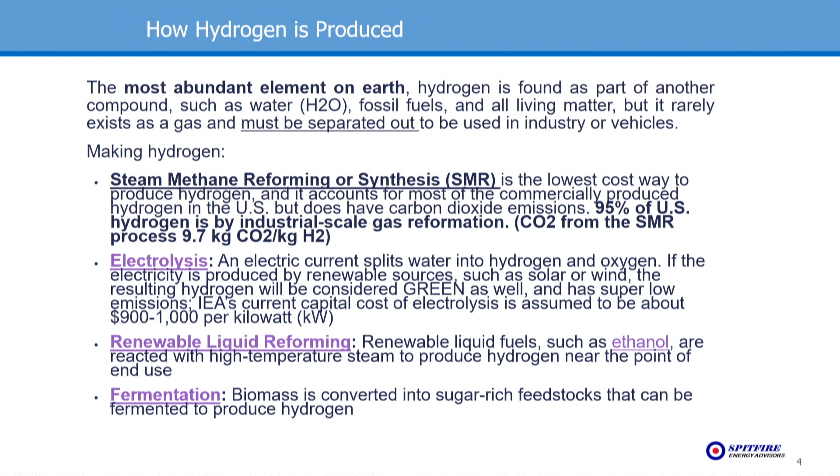That doesn't seem to make sense, but you take steam, high pressure, and natural gas, and that's how you make hydrogen. What people are talking about now is green hydrogen, using renewable electricity, wind and solar or hydro, and putting that into what they call an electrolyzer. In essence, you are breaking the water molecule into hydrogen and getting oxygen, which sounds pretty good. And that science is all proven technology.

Electrolysis, very simple math. This has been around a long time. It's, in essence, using electricity to break water. But you do have to have water to use the electrolyzer to make the hydrogen.

Now, again, talking about chemistry and politics. So we've got green hydrogen, which is made out of renewables. You've got blue hydrogen, which is traditional natural gas, but you capture the carbon on the back end of the SMR, the steam reformer, and you sequester that. Either use it for producing oil, which again doesn't seem to really make sense, or you can put it into old reservoirs. So that's what they mean by blue hydrogen.

Then turquoise hydrogen is, in essence, coming from the natural gas of an SMR, but you're using renewable natural gas, like from a pig farm or manure or that kind of thing. So that's another form of hydrogen they call turquoise. The gray hydrogen is traditional - some people call it brown, some call it black, some call it just bad. So these are the colors you get to deal with, but green hydrogen is really the holy grail, the unicorn that people are after.

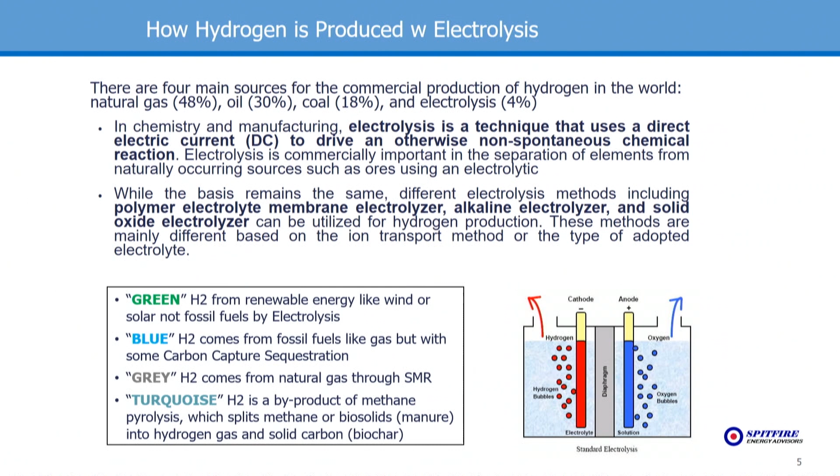Oh, I forgot to ask, how many MMBTUs are in a ton of hydrogen? Well, the answer is right there. Somebody say it. So just to give you a little perspective, 114 MMBTUs per metric ton of hydrogen. And I think most people here are gas and electricity people, so MMBTU is a language that I use a lot, but hydrogen is most often measured in tons and kilograms and megajoules and pascals, so there's a lot of units.

So I want to try and give a little bit of flavor for how you can move between electricity, hydrogen, CO2, and methane, good old natural gas. An important thing to think about: a kilogram of hydrogen has about the same energy content as a gallon of gasoline, just to try and give you a little perspective.

Now the interesting thing is it takes about 3 gallons of water to make a kilogram of hydrogen. So think of taking 3 gallons of water and getting the energy that's in a gallon of gasoline.

And it's not seawater. A lot of people say, oh, we'll just put a plant next to the ocean and use all the seawater. It has to be relatively clean water. It could be the water off of a waste treatment plant, that's clean enough. But you would have to clean up river water, which is not too big, but it is an extra step that often people ignore.

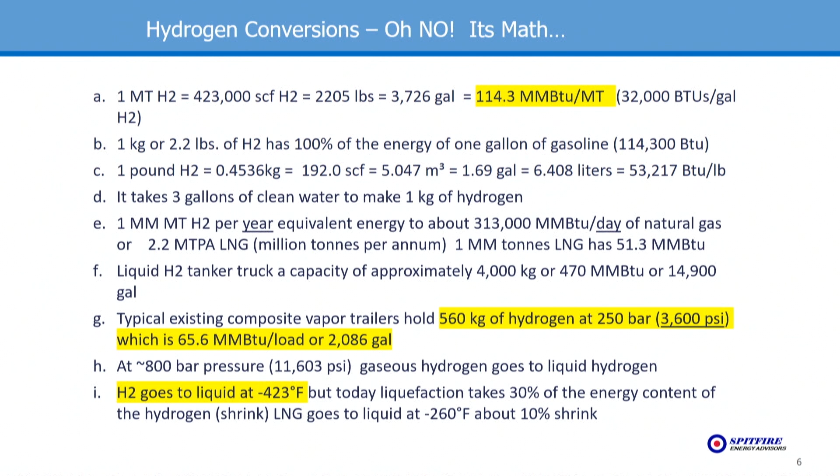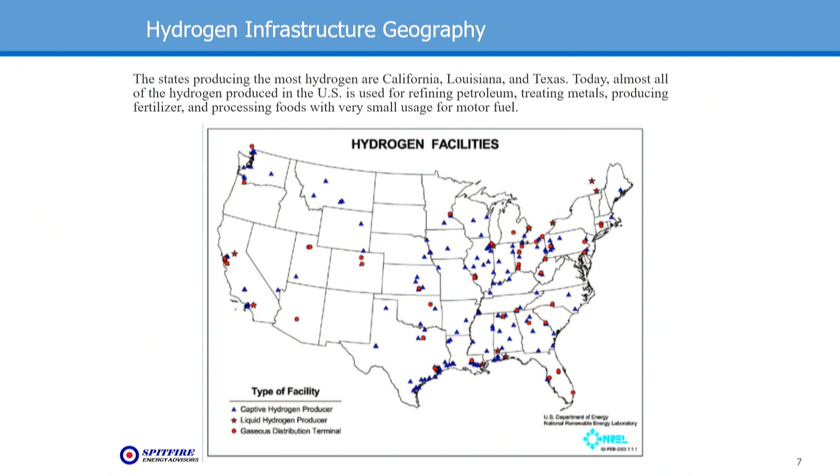So just to move along, there are a lot of hydrogen facilities around. I did not appreciate this, but I was talking to the team from Aiken, South Carolina, and they've actually got a little hydrogen production plant, and they're producing hydrogen there and actually selling it to the general public, which I did not know. This talks a little bit about the geography of where hydrogen is.

The country right now is using about 10 million tons a year. What's that mean? That's about 3 million MMBTUs per day. So it's an interesting marketplace, but it's been traditionally for refineries, chemical plants, things of that sort.

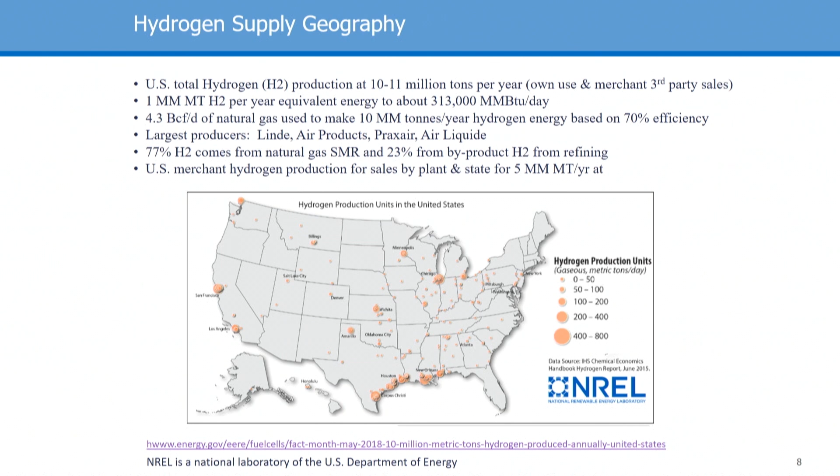The big companies, you may know, Air Liquide, Prax, which is now, they bought Praxair, Linde, and Air Products. And they're out moving hydrogen, and they wish that this whole thing would go away, because they've been making a lot of money taking air, taking water, and making hydrogen and making lots of money, and nobody ever bothered them. Now their phone's ringing off the hook, and now the regulators are calling them going, I didn't know there was a hydrogen pipeline through this state. So a lot of issues around that.

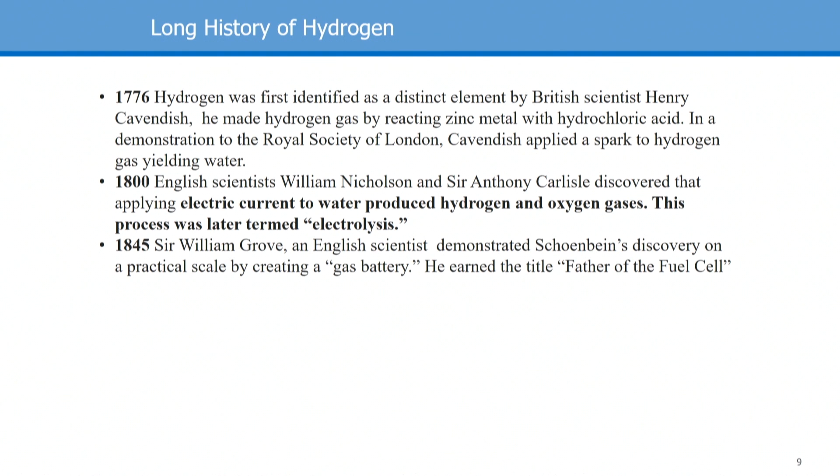So what happened famous back in 1776? Well, the United States got born, right? Well, some chemists would say a more exciting event was the development of the science of hydrogen. So hydrogen's been around a long time. In 1800, people started using it, talking about it more. And then in 1845, before the American Civil War, they actually created the first fuel cell. So this technology's been around for a while.

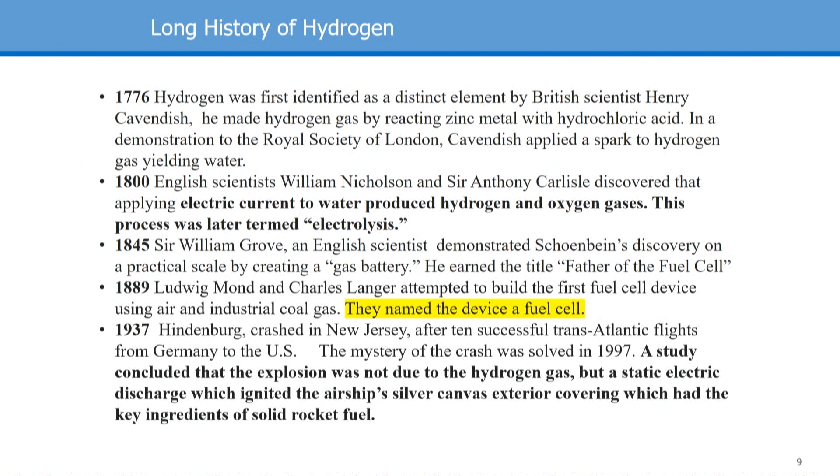The last bullet, I like history, so I thought this might be a little fun fact for you. Maybe you can win a free drink. The Hindenburg did not catch on fire because of the hydrogen that gave it lift. It was actually the paint on the skin. They didn't realize it at the time, but that paint was highly flammable. And so there was an electrical storm, a lightning strike, and that's what caused the Hindenburg fire. It wasn't the hydrogen that was stored in the Zeppelin.

So most of the hydrogen, as I said, is used for refineries and for chemical plants, but also for fertilizer. And in the Midwest here, lots and lots of ammonia goes for corn and crops and all that type of stuff. So that's a lot of what hydrogen is used for, and it's important as a fertilizer for food.

I did bring a small bottle of hydrogen. You might be able to see it from where you are. And good news, bad news, it's not poisonous. You can't see it, you can't smell it, but it was in there, promise.

Let's see, what's next here. Oh, I put this in because I wanted to appreciate that there are hydrogen transportation systems out there. I didn't know about the one in Aiken, but there are not very many. There's about 41 filling stations in the whole state of California. So it is very much in the early stages of development. We haven't seen Exxon and Shell and those guys jump in with both feet just yet. But Shell is a leading retailer of hydrogen in California, but there's only 41 stations.

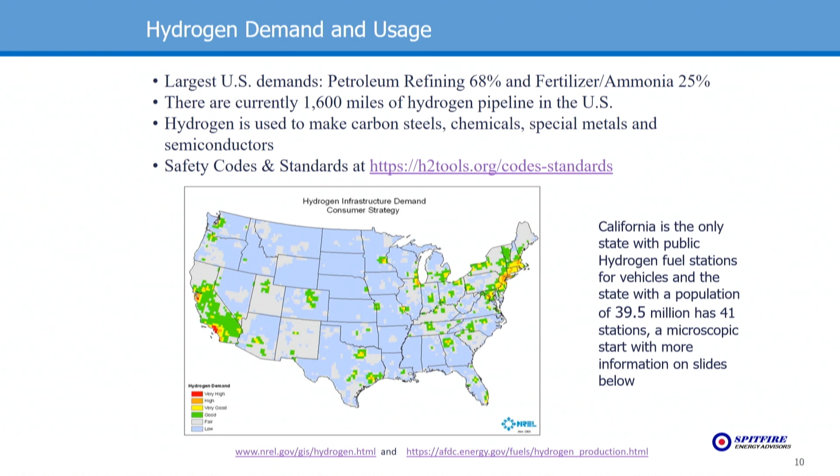So talking about hydrogen as a chemical, I mentioned odorless. It can be a volatile fuel. It does have a flash point, a wider flash point than methane. So you do have to have real serious safety concerns around using hydrogen. But it does disperse really quickly because it's very, very light. And that's a good thing, but being very light means it's hard to transport, hard to compress, hard to liquefy. So the transportation of hydrogen is expensive.

Kind of talked about where we use it in refineries. I thought this was an interesting scientific answer. As the products of the reaction are at a lower energy level than the reactants, the result is an explosive release of energy and the production of water.

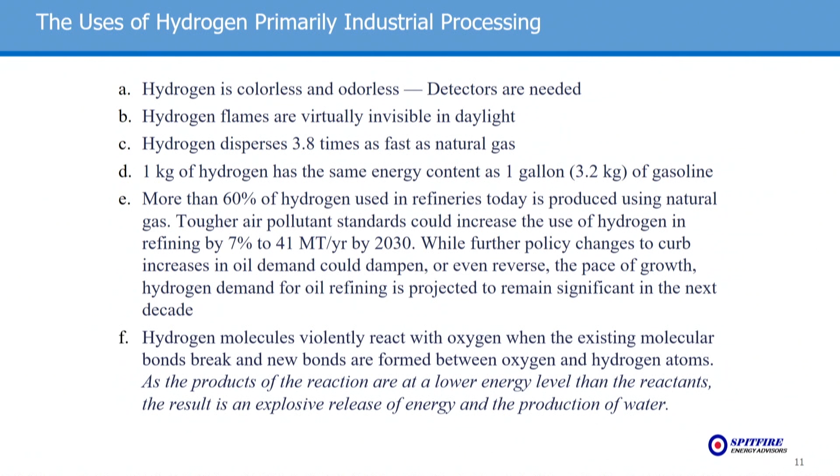Well, that's how you consume it. That's the scientific approach. We just use it in an engine or a fuel cell.

So there's upcoming slides here that talk a little bit about the cost of making hydrogen, and then I'll talk about the cost of transporting it. You do need water, as I said.

Think about a kilogram, $1 a kilogram is about $8.50 an MMBTU. Gasoline at $2.50 a gallon is about $21 an MMBTU. Often people don't appreciate how expensive gasoline is on an MMBTU basis, but that's one reason gasoline is good, because you've got a whole lot of energy in a very small space. It's the exact opposite with hydrogen, and I'll talk a little bit more about that.

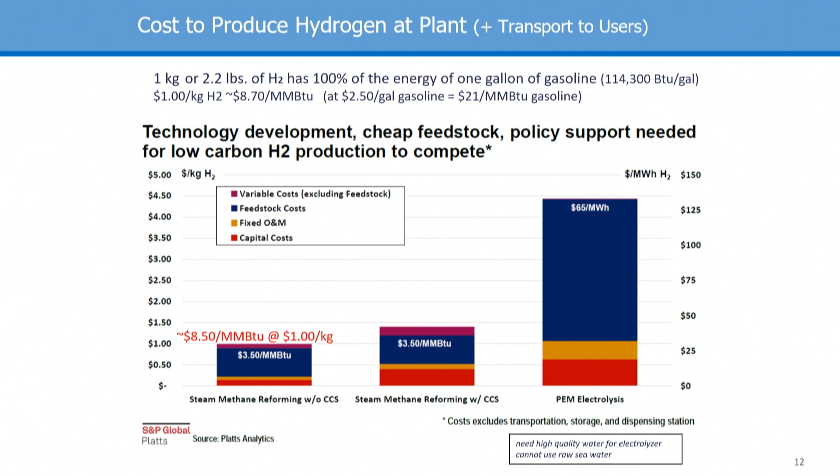So on the left, you see $8.50 for $1 a kilogram. That $1 a kilogram is traditional natural gas into hydrogen with an SMR—brown, black, gray, whatever you want to call it. That has been traditional. That is not what environmentalists or politicians want to see. They want to use green hydrogen with electrolysis, which is the price on the far right.

RBN, if you're interested in hydrogen, they actually have something called a hydrogen billboard, and it's free. They have a good story once a week talking about hydrogen. The guys at RBN I talk to all the time, and I would say that they're very knowledgeable in the space. So I'm going to read the last bullet.

Green power, solar or wind, at $30 will give you hydrogen at about $2.90 a kilogram. That's $24, almost $25 an MMBTU. So it is not inexpensive.

This is a summary looking at producing hydrogen based on gas price. I personally think you're going to have pretty stable natural gas prices for a while, maybe around $3 for quite a while to come. Fracking has done a good thing for the country and given us a lot of cheap energy. And now we want to turn that cheap natural gas into more expensive hydrogen. That's an interesting math problem somebody's going to have to explain to me.

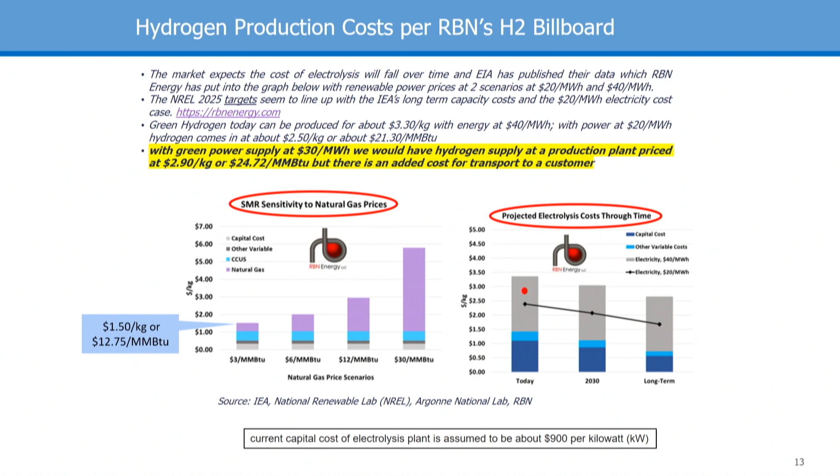But if you think about how electrolysis works, people are assuming, and this is probably a good assumption, that science is going to take over and that you will see the cost of producing hydrogen come down. But right now, as I said, with traditional SMR, we're kind of in that $1 to $1.50. And if you're using $30 power, that gets you to about $2.90 per kilogram, which is $25 an MMBTU.

This is another slide from a different authority talking about how they see price, but it kind of all rolls into the same thing. There are different types of electrolysis technology, and the scientists are working a lot on this right now. The federal government is spending a lot of money on research, just like they are with batteries. There are a lot of study groups and a lot going on. There's a lot of information online, and in the slides that are in the handout, I've got a lot of website links to give you connections to some of that data.

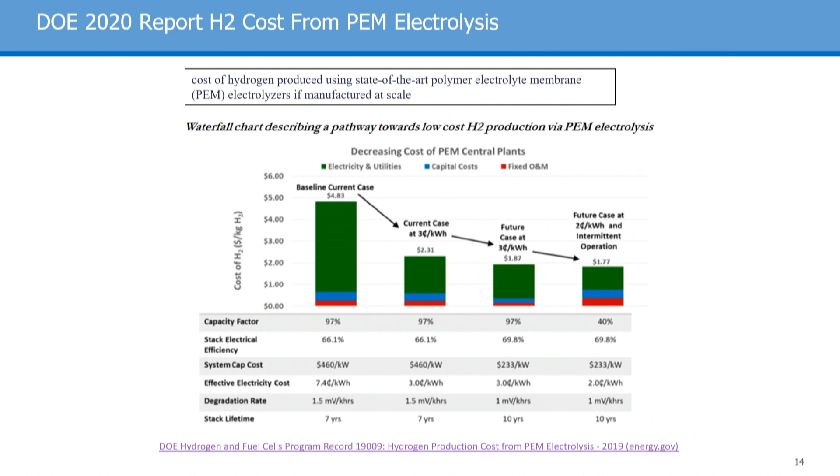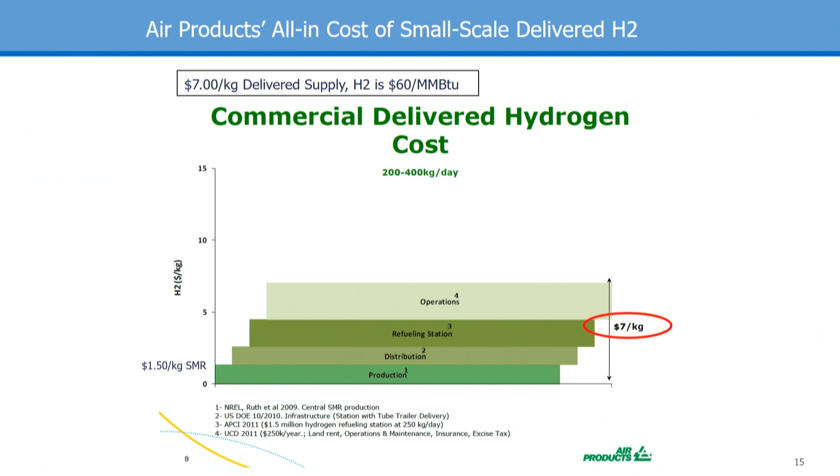So if you think about that $1.50 to make it, the killer is to transport it, to store it, and to get it into a car or a truck—about $7. And that $7 equates to about $60 an MMBTU. So think about gasoline at $10 or $12 a gallon. That's the theoretical hurdle that people are going to have to get comfortable with. Would you choose to pay $12 for a hydrogen fuel fill-up versus where we are today?

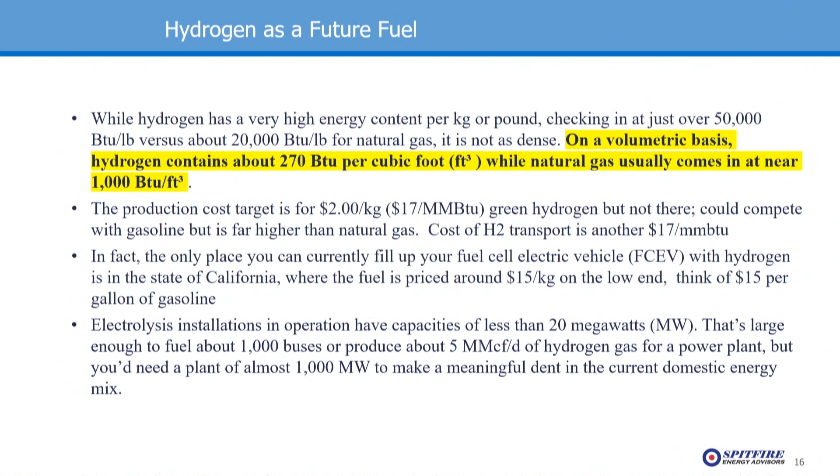So I was talking a little bit more science, a little more technology. On a volumetric basis, hydrogen has 270 BTUs versus natural gas at 1020, 1030. So that's part of the issue. And that's why we put gasoline into cars, because you have a lot more energy in that small volume. And that's part of the problem we get to with hydrogen.

I talked a bit about green hydrogen, using solar and wind. You put that into the electrolyzer, and then what do you do with it then? Well, you can truck it or build a hydrogen pipeline. I want to talk a little more about what that means.

Part of the issue with burning hydrogen in a conventional engine is you get a lot of NOx. You don't get so much CO2 or other particulates, but you do get NOx. That's why hydrogen in a conventional car is not a good thing. That's why you see Ford, General Motors, and Toyota all using fuel cell technology, because that really is zero emissions for road fuel, if you can pay the price. So the technology's there, and I'll talk a little more about that.

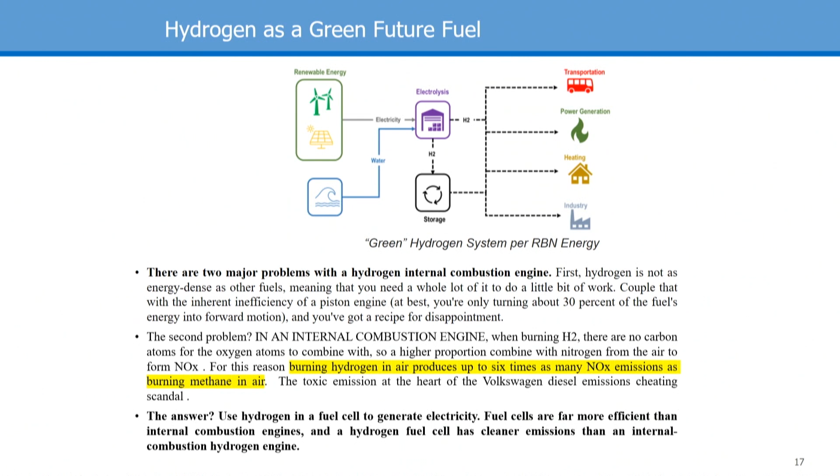For power guys and gas guys like me, the important thing is some more math talking about how many cubic feet you get from electrolysis, how much natural gas you have to put in. I'm not going to go through all the math here, but you've got the study sheet to take home. I think the important thing to realize is that if you put 1 megawatt of solar or wind into electrolysis, you get about 42, 43 MMBTUs of hydrogen out the back end. So that gives you a little bit of feel. You've got to have a whole lot of wind and solar to make any significant amount of hydrogen. Any questions out there?

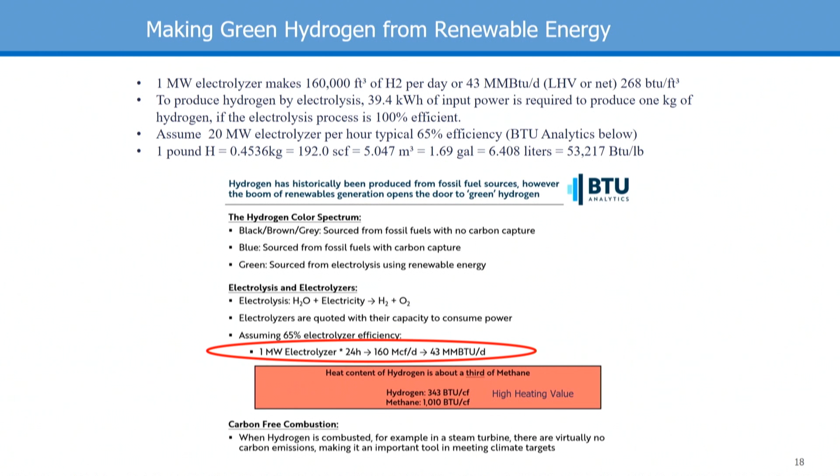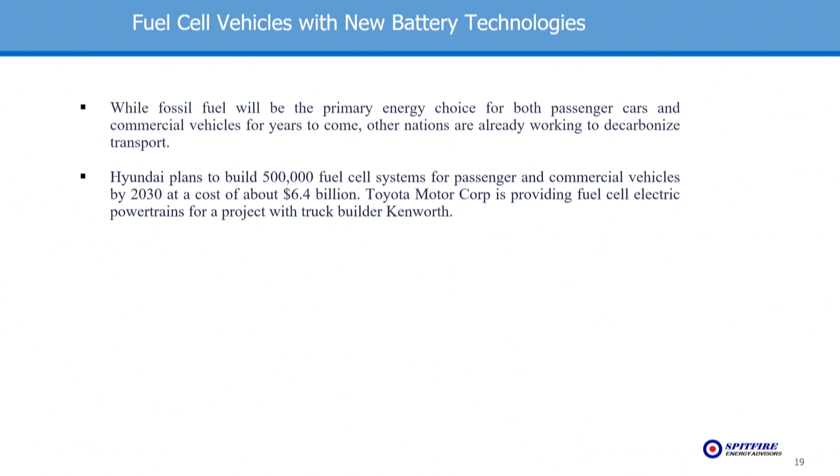So I was talking about fuel cells and how they work. Hyundai has got a workable technology. The good thing is people have been working on hydrogen for a long time. When oil was $100 a barrel, people were using natural gas for vehicles, and LNG was going to be the next renaissance. But there were a whole lot of people putting money into research to use hydrogen because they knew it was zero or very, very low carbon emissions. So a lot of money's been put into it. The technology's there, we don't have to invent the wheel. This is all pretty available stuff as long as you can afford it.

The important thing, too, is it's not just cars, but there are now trucks, 18-wheelers, that can store enough hydrogen on board that they can go like 300, 350 miles. So it is a workable fuel for long-haul transport. Part of the math model is what's it cost to buy one of these trucks. It's a little more expensive than a diesel truck, and it's harder to find hydrogen at this point. So you'd probably use the trucks where you've got a nest, like in a harbor, like Long Beach or LA. They use LNG for all their trucks. The Port of Houston would be a good place to use hydrogen. So a lot going on.

The important thing, too, with these 18-wheelers, the complaint with natural gas was you didn't get enough acceleration. You mashed on the gas, you didn't get what you needed. Well, Tesla broke the code on that, so when you get in a Tesla and push the pedal down, you're going like a gunshot. The trucks, the 18-wheelers, have developed the engine package now so that you get enough torque to handle a 50 or 80,000 pound load. And that's what those guys are looking for. They didn't want to have a load restriction on an 18-wheeler chassis.

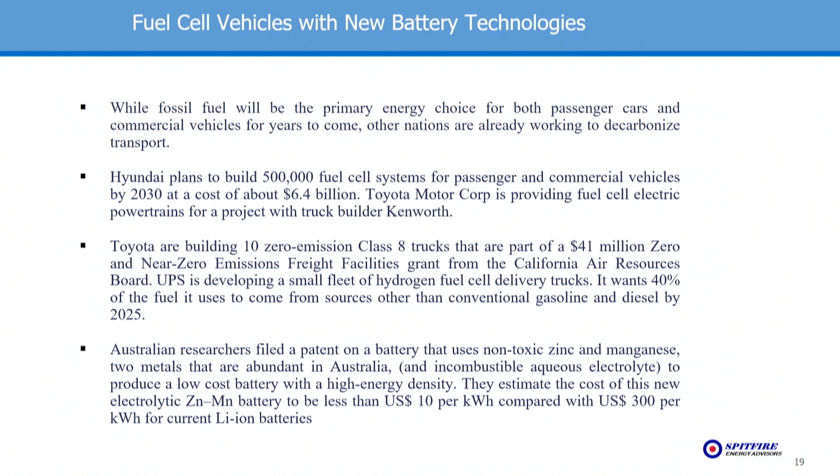So a little more information about a fuel cell in a car. You basically put hydrogen in. There is a process in the fuel cell to produce electricity. The electricity then uses a motor to produce work, and off you go. Toyota has done a really good job of selling their product, but it really is workable. Now, most of these cars have an onboard battery, and that battery is typically charged when you press the brake. So they are trying to capture as much energy as they can to make it as efficient as possible.

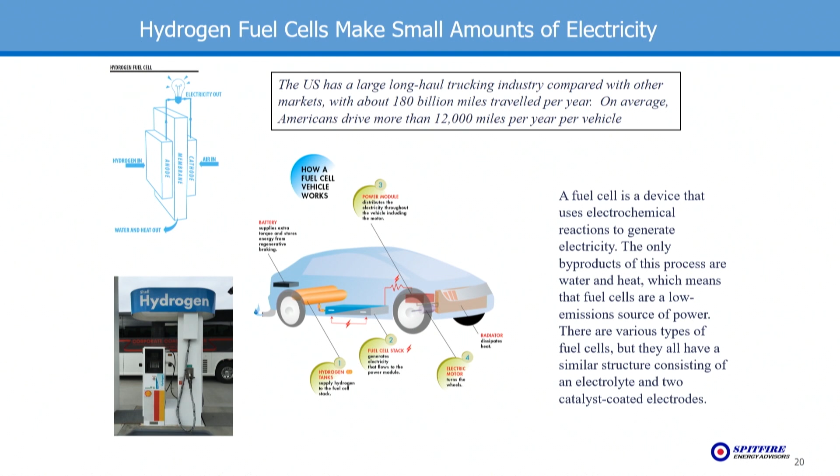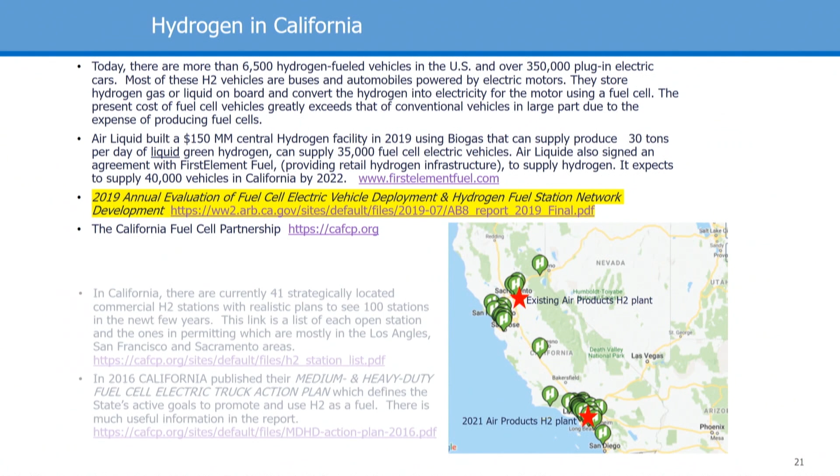That's a technical term for what a fuel cell is. I mentioned Shell. This is one of their filling stations out in California. Looks just like a gasoline pump. You pull up and you can get a full load of 15 to 30 kilograms of hydrogen in about 4 minutes, so it's a pretty quick fill. A bus takes about 10 minutes to fill, and it holds about 30 or 35 kilograms, and it can go 300 miles in a day. So they'll fill up a bus in the morning, it'll drive all day, and then they're good to go. California, you can see this is where their fueling stations are around the big cities, and it is, as I said, a little bit expensive.

This is an interesting program. It's a bus program out in Orange County, and they've got 10 buses running on hydrogen now. They use about 30 kilograms a day, so when they get to their full build out of 50, they'll be using about 1,500 kilograms a day, and they need about 5 megawatts of wind or solar to generate that fuel. So it is ongoing, and 5 megawatts is not that much solar to put on the ground, but it's only going to run about 50 buses. But it could be useful. Atlanta's got 10 buses running, and Aiken's got 1. So it's a business that's, let's say, in its formative stages.

Back to the question of how much does it cost. In California, to go fill up, it's about $14.00 per kilogram to fill your tank. That works out to about $120 an MMBTU because it's the cost of transportation, not just the production cost, it's getting it to the pump. And oh, by the way, they're still taxing it as a road fuel. Now, one way they could levelize the playing field is to take the tax off of the hydrogen. But the state doesn't want to do that because they need that money.

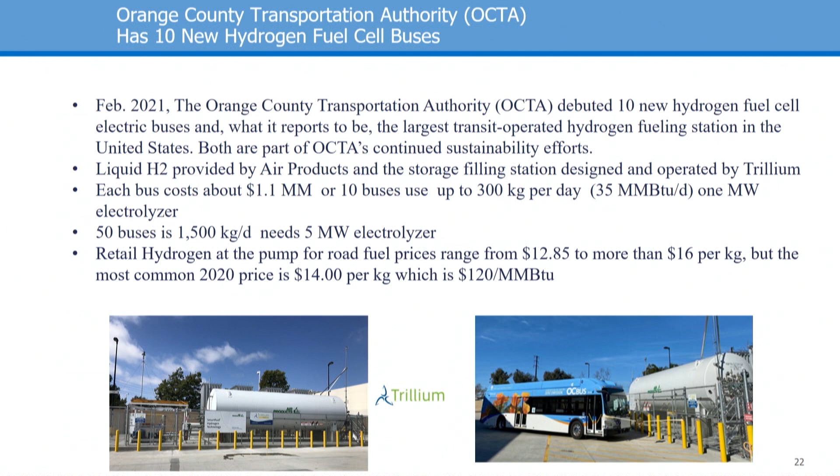So you can see in the photograph here, that's a hydrogen storage tank, and you can see the bus on the right pulling up. It's just like the Shell pump - you put it in just like you would with a car pump to refill.

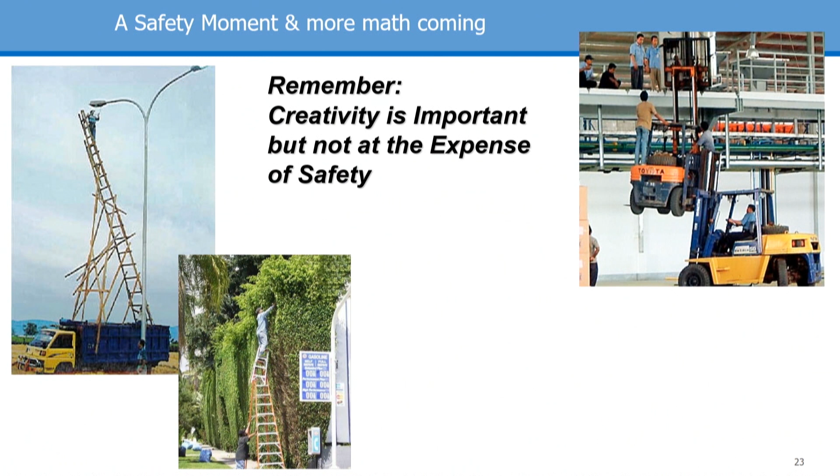So take a deep breath and remember that creativity is important, and there's a lot of scientists out there working on this stuff. But even with creativity, safety is paramount. You have to be careful with hydrogen - you don't want to smoke a cigarette, you don't want to be on your cell phone. But it really is a controlled transfer process from the pump into the vessel, as opposed to gasoline where you see the vapors coming out. So really a hydrogen refill can be safer than gasoline.

So I'm glad I wasn't driving the forklift that day.

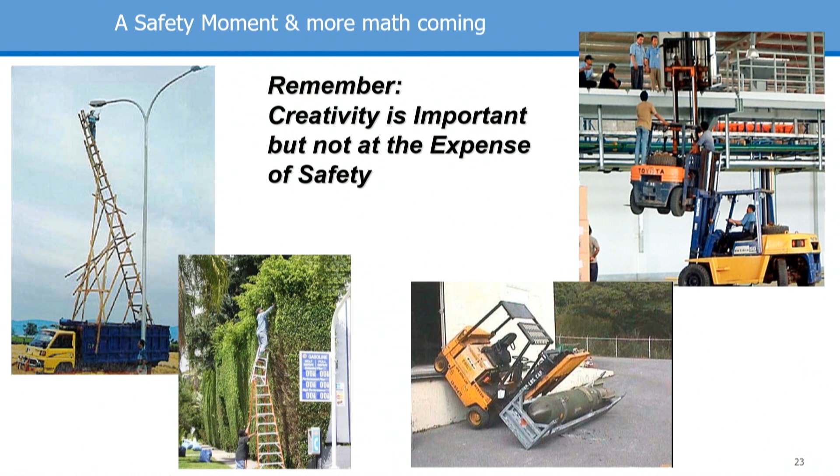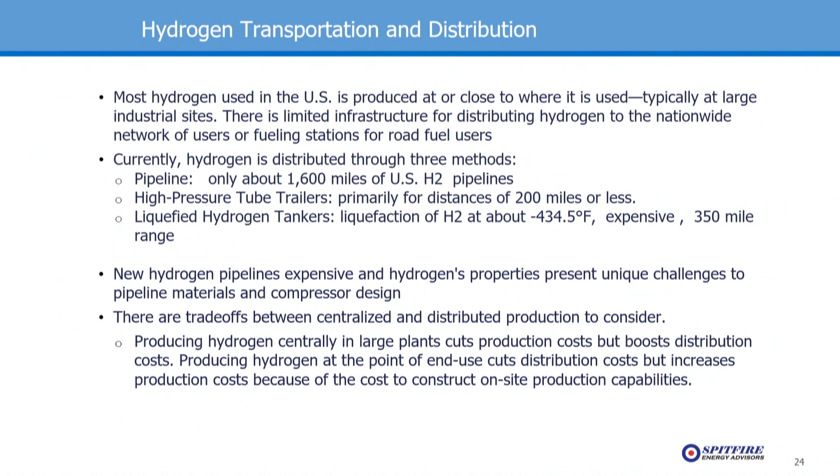Talking about distribution, there are pipelines to move hydrogen, and it does take a different type of technology. That's part of the issue you get into with hydrogen - you can't just use existing natural gas pipelines for it. The hydrogen really will react with a carbon steel pipe, and there are issues with embrittlement. You also have problems with the valves and the gaskets in flanges. So when people say, oh, we're just going to convert the whole natural gas network to hydrogen, we'd have to say probably not. But there are about 1,600 miles of hydrogen pipeline - you probably never read about it. It's very safe, it's been operating for a long time, since the 40s. So it's the same kind of thing, off-the-shelf technology.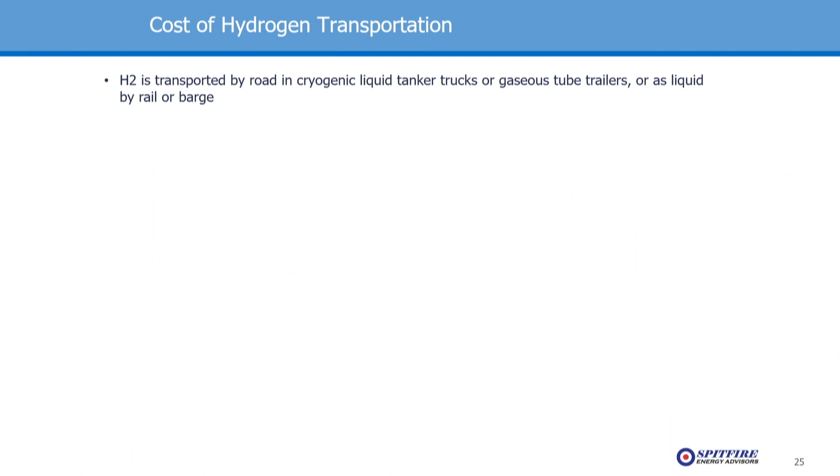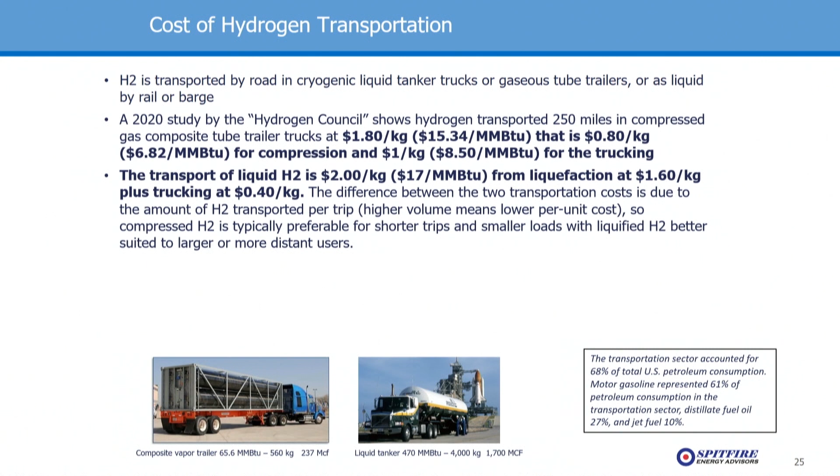This is part of the problem with hydrogen that we've got to overcome. What this tells you is you'll probably build hydrogen plants close to the load center, which is contrary to natural gas or power generation, where transmission is relatively cheap. Looking at these numbers, it's about $2 a kilogram, or about $17 an MMBTU to transport hydrogen by truck. So on top of your $15, $18, $20 an MMBTU to make the hydrogen, you're adding another 17. You can see where the math is tough. The economics commercially, unless it gets mandated by the policymakers, is all pretty tough stuff.

I did talk a bit about pressure - 3,600 PSI is pretty high pressure, and that's part of where the cost comes from to try and get all that hydrogen into these tube trailers.

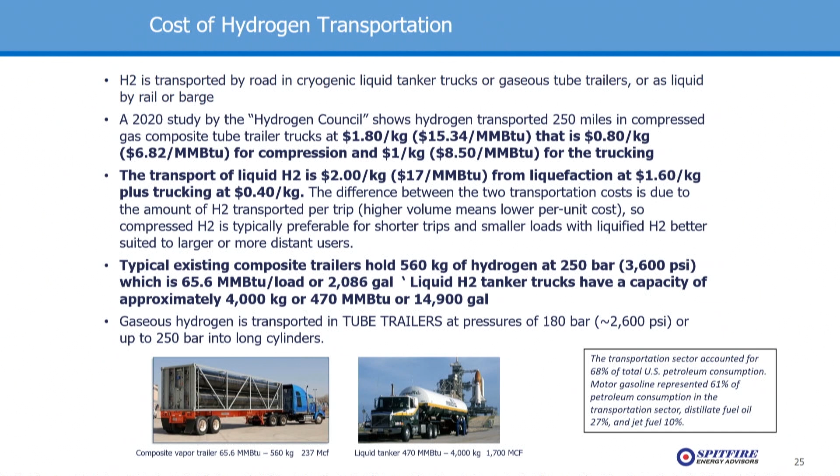Think of New Orleans converting all their buses to run on hydrogen - that would be one tool in the toolbox. To equate this, 1.4 BCF a day of hydrogen is about 388,000 MMBTUs. A 1,000 megawatt power plant uses about 150,000 to 160,000 MMBTUs in a 16-hour day. So all this hydrogen would supply 2,000 megawatts of power generation. It doesn't even move the needle or have any impact based on the whole country.

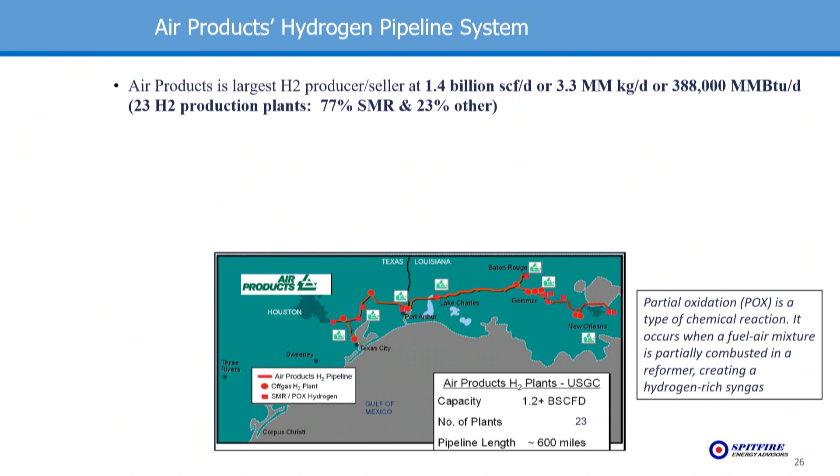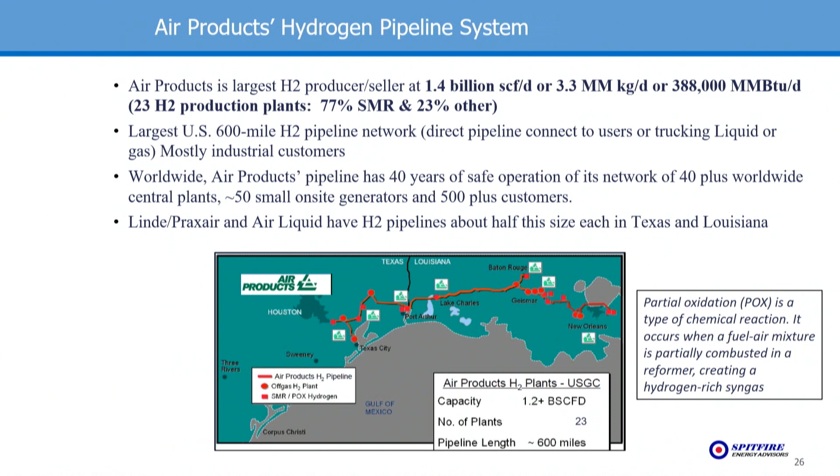So there's going to have to be a whole lot of hydrogen made. I don't want to get into too much detail here, but there are a couple of other pipeline networks - Linde and Air Liquide both have pipe networks in the same neighborhood, about half the size of Air Products. But I suspect there'll be more hydrogen pipelines built in the coming years.

I did talk a little bit about cars and trucks using fuel cells. Who knows what the word Mirai means in Japanese? Anybody? There's a prize, I brought prizes. It means the future. I guess we don't have many Japanese speakers here. Mike - Hajimemashite. So back to our story.

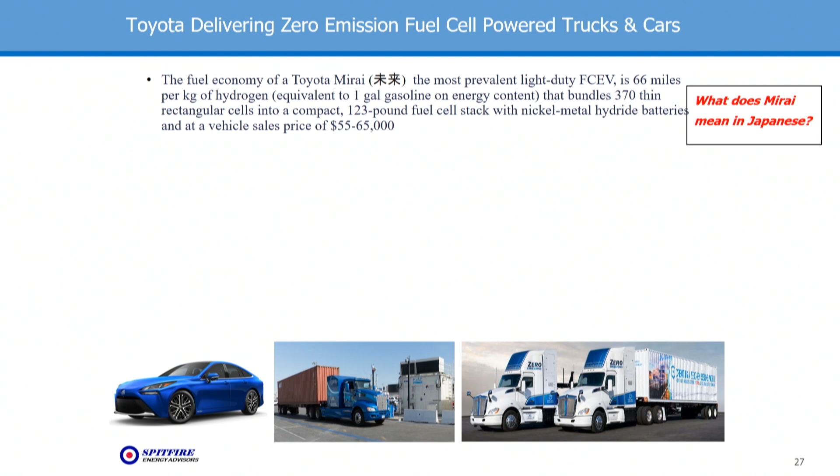The good thing is that these cars perform just like a gasoline car, but they are not inexpensive. You're talking about $60,000 for a fuel cell vehicle - that's pretty up there. My Ford F-150 fully leathered out and everything else is still little less than $60,000. So it's going to be tough to get people to convert on a pure economic basis. They really have to be motivated for the environment.

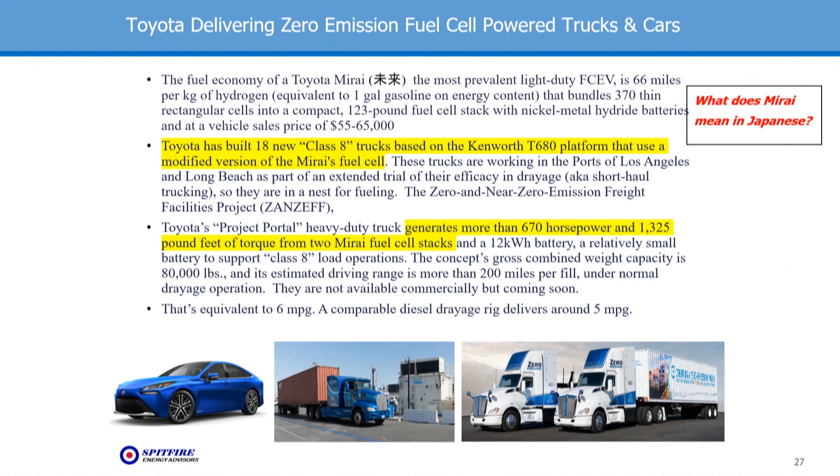I had talked a bit about the trucks that Toyota is building, the ones down at the bottom right there - 670 horsepower, big, powerful trucks. They can do everything that a diesel truck can do. That's the important thing operators want - they want that same fuel flexibility, but they don't want to pay more money. And that's where the difficulty comes in. So I think there's going to have to be some political decisions made.

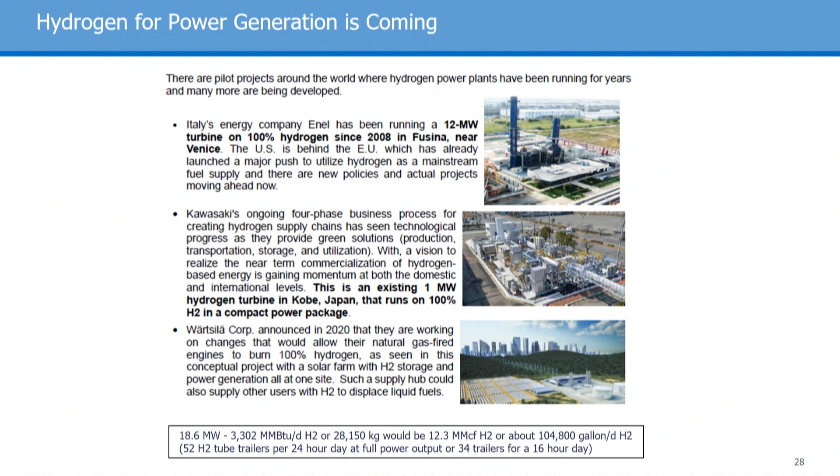Just talking about small-scale power generation, there's a plant operating in Italy with turbines on 100% hydrogen. There's a 1 megawatt turbine that Kawasaki put on the ground in Kobe, and that plant is the kind you could see in the United States - distributed generation where you have on-site water being used to make hydrogen, and you've got the turbine right there in your load center where you need it, zero emissions. That's key. There is NOx when you burn hydrogen in a turbine, but that's pretty easy to clean out. So you can have very low emissions with hydrogen right in a load center. That, I think, will be one of the things people are motivated by.

There is an ongoing test pilot project with Entergy, which serves Texas, Louisiana, Arkansas, and New Orleans. They have officially come out and said they want to put in a new turbine at their Sabine power plant, which is a natural gas combined cycle plant. Mitsubishi has a technology today where you can blend hydrogen with natural gas right into the turbine, and you can still maintain low emissions without any issues with the turbine. This gives you a little flavor for how you can apply hydrogen today at a utility scale - by blending it in with natural gas.

Another project is out in Utah called Intermountain. It's an existing coal-fired plant that the city of Los Angeles built because they didn't want a coal plant in California, so they built it in Utah and then built a DC power line. Then they decided they felt guilty about using coal, so they'd convert it to natural gas. Then they felt guilty about natural gas, so they said they'll blend in some hydrogen. So this is a multi-billion-dollar conversion of a perfectly good coal plant, but it's going to be much more environmentally friendly, and California is certainly pointed in that direction.

So they're going to have two turbines using natural gas and hydrogen blended in. Now the problem I haven't gotten an answer to is - remember, you have to have water to make the hydrogen, and this is in the middle of the desert. So this is going to be an issue. This is just a little more information about the project and the blending. But again, it is off-the-shelf technology, so it's available - we don't have to invent the rocket ship. It's basically available.

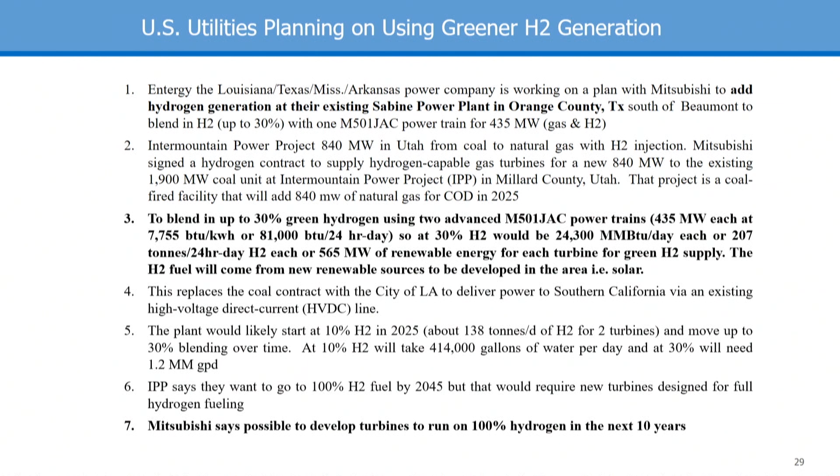Unfortunately, you cannot run a gas turbine on 100% hydrogen right now, and that research is ongoing. People talk about using hydrogen or ammonia to run ships or airplanes, but that's really at least 10 years off. Big companies like GE - if you want to blend hydrogen into an existing gas turbine today, you better read the fine print on your warranty and service agreement, because I don't think GE is going to cover everything if you start blending in hydrogen. So another commercial aspect to keep aware of.

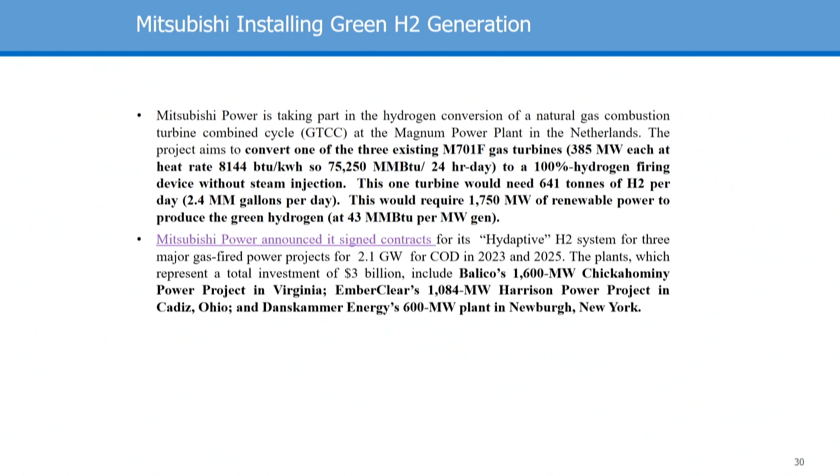These are just a couple other projects around the world that Mitsubishi is working on. There are plants being built. Regulators in some states are saying, this is a good idea, we're for greener technology, let's put these pilot projects on the ground and make it happen. We really don't care what it costs because it's so small. So it's a work in progress.

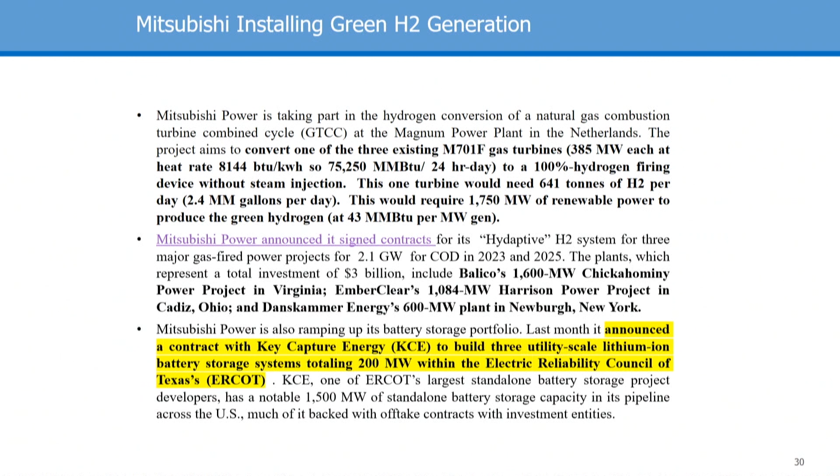I will say too, Mitsubishi is doing a lot of battery work. Somebody was saying they were putting batteries on the ground to be part of their resource mix. It's a good tool, also a bit expensive, and the battery life isn't very long at this point. But using hydrogen at a load center can be an alternative to using batteries. So more math - chemistry, math, conversions, all of these things.

I wanted to talk a little about how this compares to natural gas if you blend hydrogen into the pipeline. So you think you've got a 16-inch pipeline, you're moving about 200,000 MMBTUs a day of natural gas. If you do the math, you lose about 10% of the energy transport capacity by blending in 12% hydrogen, because there's too much hydrogen and it displaces the natural gas. So in the same pipeline, you're only delivering about 182,000 MMBTUs. Does that make sense math-wise? No math teachers in here to correct me?

So you talk about high pressure - this is really high pressure. 11,000 PSI is typically what you would get in a storage tank at a facility, if you don't have access to liquefied hydrogen. With liquid, you get a lot more storage capacity in the same volume. If you want to liquefy it, you'd go down to about minus 400 degrees. You think of LNG and how expensive that is to liquefy natural gas - that's minus 260. So these are part of the problems you get to with transporting hydrogen.

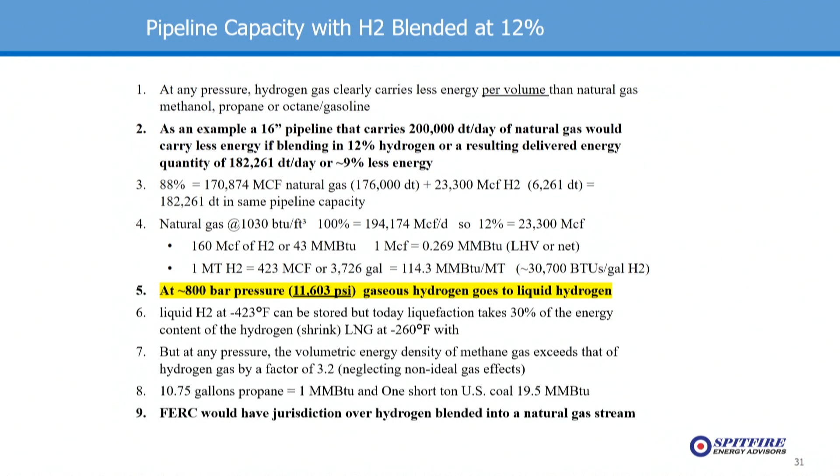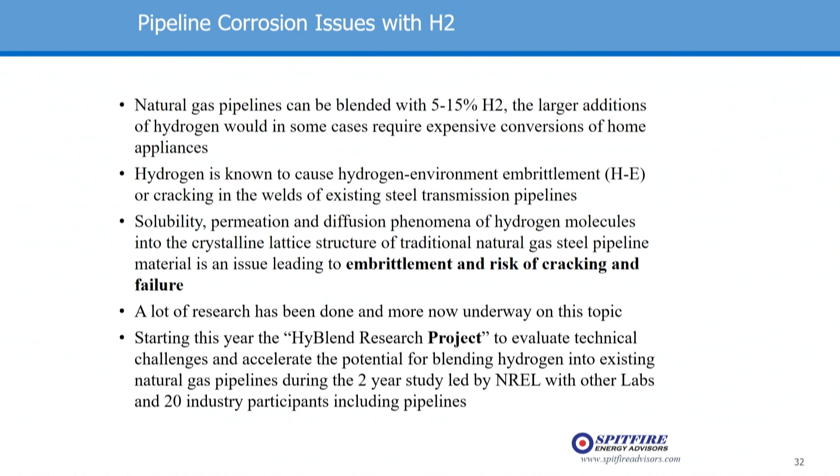So I talked a little bit about the problems of embrittlement and using natural gas steel pipelines for hydrogen. This is just a little bit of the issues you get to. I mentioned the problems with valves and gaskets, but there's a lot of research going on, and in the handout deck that's on the website, there are links to some of those research groups. There's a group called HyBlend, sponsored by the Department of Energy, that has a 2-year program analyzing what they could do to utilize natural gas pipelines to move hydrogen.

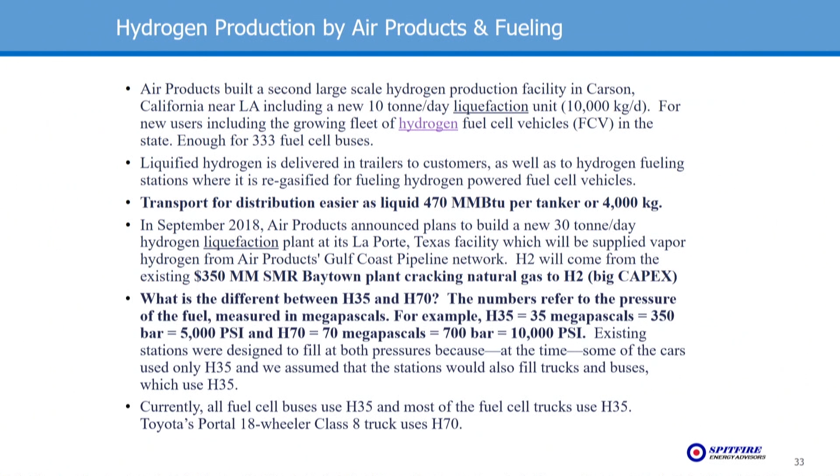I talked a bit about Air Products and what they're doing for transportation of hydrogen around the countryside. You'll hear, or read about hydrogen, H35 or H70. It's kind of like ethanol - E25 is 25% ethanol, E10 is 10% ethanol. It's the same thing here, but it's based on pressure, and it depends on what kind of vehicle you have and fuel cell, whether you use H35 or H70. H70 is 10,000 PSI - it's really high pressure. But these tanks are built to take it, and there's been all types of testing. They shoot it with high-powered rifles, they burn it, they crash it, and these tanks are designed a lot more safe than a gasoline tank in your car, for sure.

Plug Power is building a big plant up in upstate New York, $290 million. They're going to make 45,000 kilograms a day of hydrogen, which sounds like a whole lot until you do the math that you now know how to do, and you're getting not a whole lot - 5,000 MMBTUs a day of energy. That's not going to run a very big power plant, and you need 120 megawatts of solar, wind, or hydro to make that hydrogen. So a 100 megawatt solar farm is a pretty big solar farm. You also think about how much water you need for that - this would be about 135,000 gallons a day, which may sound like a lot, but a golf course will use about 1 million gallons a day in the summer. So it's really not that much water until you're starting to want to provide 1,000 or 2,000 megawatts of electricity.

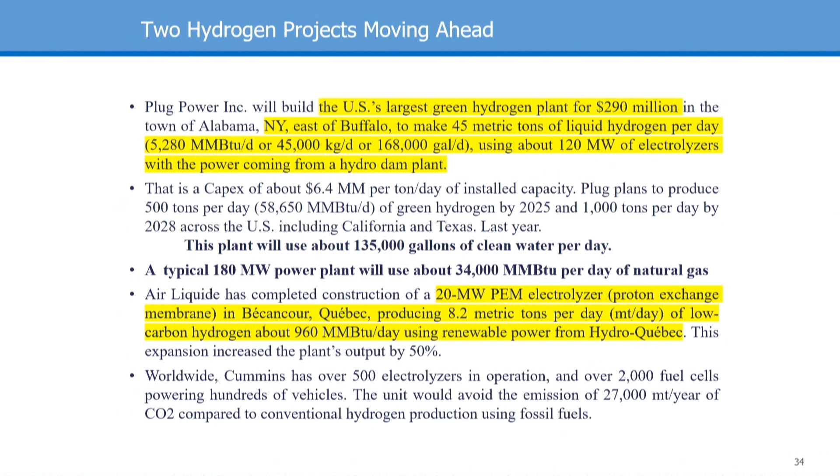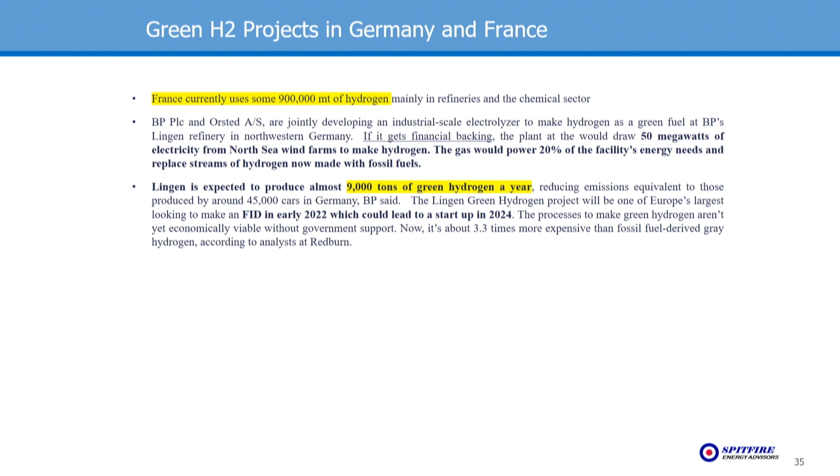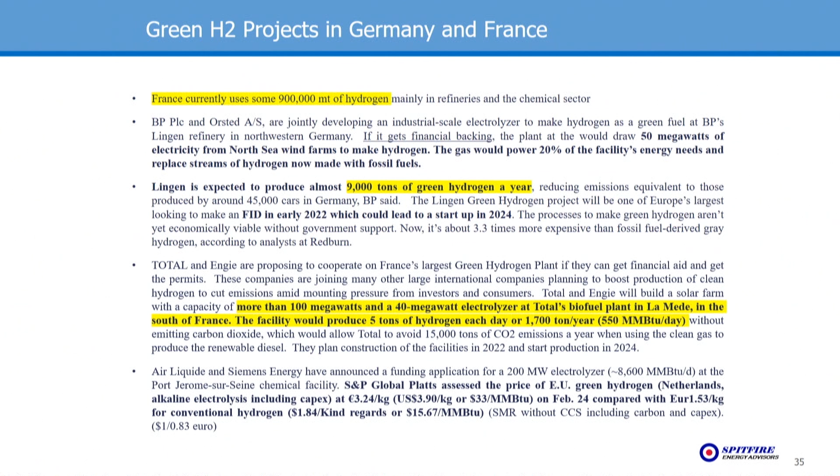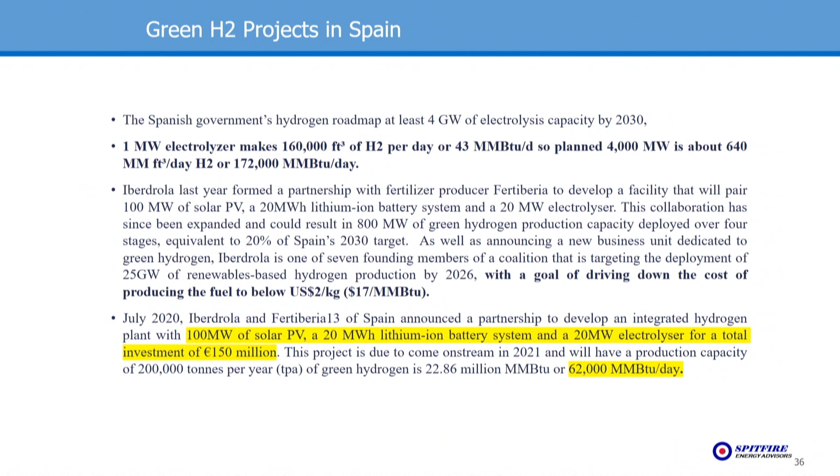There's a little more math here for the math majors in the class, talking about the costs and the economics around doing these projects. Talking about what's the future for hydrogen in the United States and really the world, you have to think about lowering the cost of producing hydrogen. But really we need to work on how we're going to address the cost of transportation - building new hydrogen pipelines, fuel supply depots, filling stations for the general public, all of those kinds of things.

And it is about energy density. That's why gasoline was so successful early on - you could put a whole lot of energy into a 15-gallon tank for your car and go 450 miles. So price, and price - the cost of transportation, the cost of production. So how are we going to break that code? I talked about storage and compression, liquefaction, those kind of things. Hydrogen is really still pretty much a specialty gas for chemical plants, refineries. It has not made it mainstream yet, but the government wants that to happen.

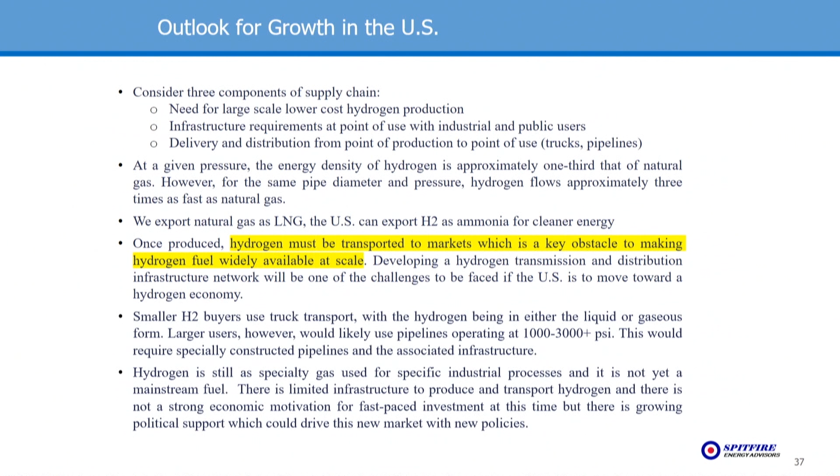And that's how we got wind and solar, was tax credits. So that's not necessarily a bad thing. The government can be really instrumental in trying to make that happen. And that's where I wanted to conclude - what is the greener future and how do we get there? I think it comes down to governments and political action groups and people, individuals making a choice that they want to be greener. But it will be the governments, the regulators who say we want it to happen, and we're going to let you pass the cost through.

But unfortunately, that comes to my dinner table and your dinner table when you're paying $15 a gallon equivalent for your road fuel. Think about paying $12 or $15 a gallon for gasoline today - that'd be a really hard pill to swallow socially. Even if a state mandates it, maybe like California, it'll be an evolution, not a revolution. I mean, we got wind and solar - it took about 20, 25 years to get an impactful amount of wind and solar on the ground.

And I would say it'll probably be about the same to get hydrogen to a point where it's a mainstream fuel. But the technology's there, the will is there to be greener. The problem we've got to work on is the math and the commercial economics of that, and will people accept it? Because President Biden and the administration are pushing this very green agenda, but you don't hear them talk about the price. And I think when that starts to get to be more widely distributed, you're going to have a real catfight at the next election.

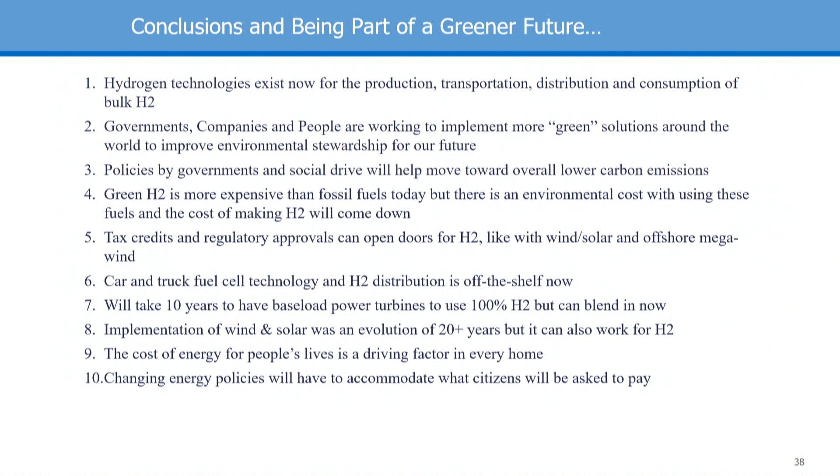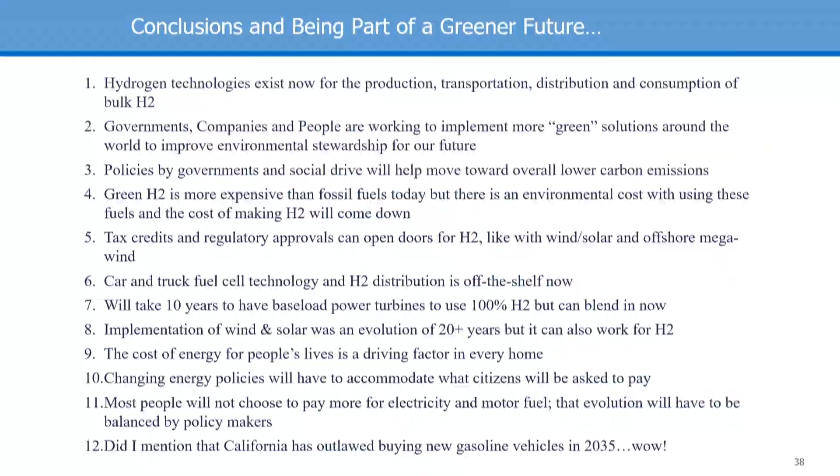And that's part of where I think this story goes. So I did mention California - yes, they have outlawed internal combustion engines by 2035. So the start has begun. And I think that's where I'll leave you, and hopefully I can answer questions. But California has outlawed internal combustion engines - you won't be able to buy a gasoline-powered car in 2035 in California. And they've only got 41 hydrogen filling stations today.

So if anybody needs to run catch a plane, no offense, but I think we're open for questions. I didn't overwhelm you with math, I hope.

We've got a couple of questions from our virtual audience. The first one is, batteries suffer in the colder climates - how does hydrogen perform in the north? Yeah, that is a good question. It is not an issue. Much like gasoline, you don't have issues with cold, and a fuel cell will operate fine in heat or cold. So I'd say that's not a big hurdle.

And our second one is, they were wondering if you could comment on what widespread adoption of hydrogen would do to water supplies. Well, it is a consideration, especially if you're trying to convert a coal plant to hydrogen in the middle of the desert, right? So it is a consideration that has to be rolled in.

Fresh water today is a real problem in the United States and around the world. So with big-scale hydrogen, you're going to have to see desalinization of seawater or brackish water, like from a harbor in Tampa, Houston, or Los Angeles. They're already doing it, and it's going to be an issue. It takes 3 gallons of fresh water to make 1 kilogram of hydrogen, and remember, 45,000 kilograms of hydrogen is only 5,000 MMBTUs for a power plant. So it's going to be a lot of water. Good question.